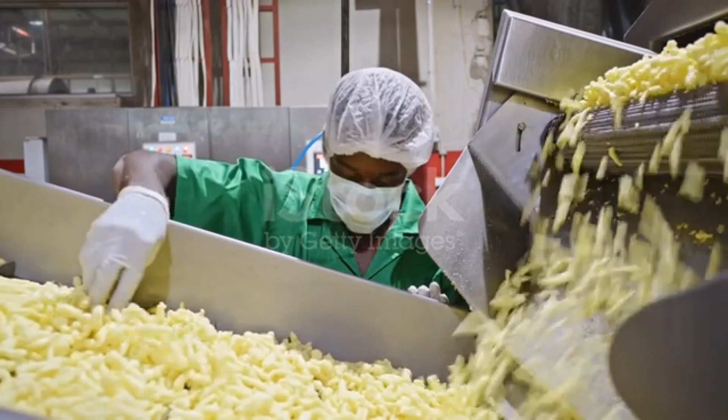This steady growth is being assisted by anticipated recovery in global tourism, increased manufacturing activities, and a number of mega projects. As we have heard about those statistics, we have seen mega projects as one of the areas Rwanda is using seriously to attain its goals of economic growth and development.

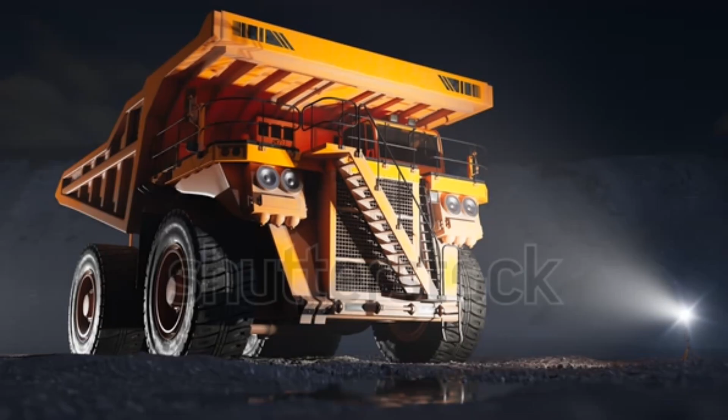In this video, let's put focus on a number of mega projects Rwanda is coming up with from 2024 through 2025 up to 2026.

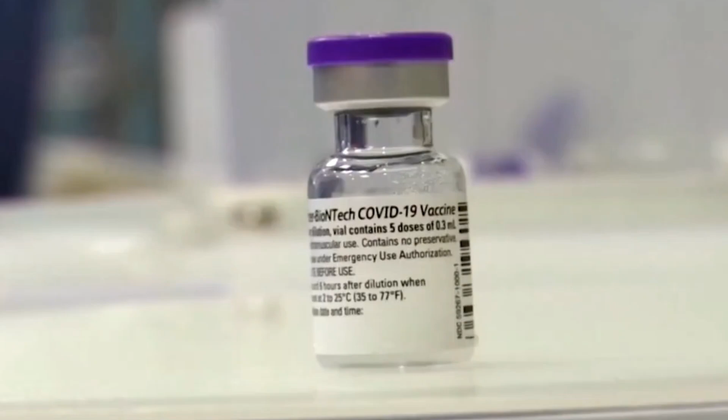BioNTech mRNA Vaccine Manufacturing Facility Project. With an aim of setting up the first BioNTech high-tech manufacturing solution for messenger RNA vaccines, or simply mRNA vaccines.

mRNA vaccine is a type of vaccine necessary for protein production for treatment of viruses such as coronavirus, and is a magnificent upcoming project in Africa, specifically in Rwanda, for future pandemic preparedness.

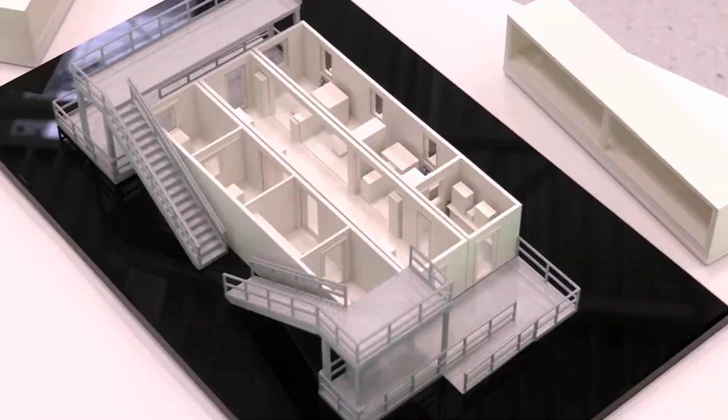BioNTech, a vaccine manufacturing company, is willing to accomplish a number of structures at the Kigali site, after which local training will be provided for specialist personnel at the facility in 2024.

Thereafter, mRNA vaccine production for process validation is expected to be initiated in 2025.

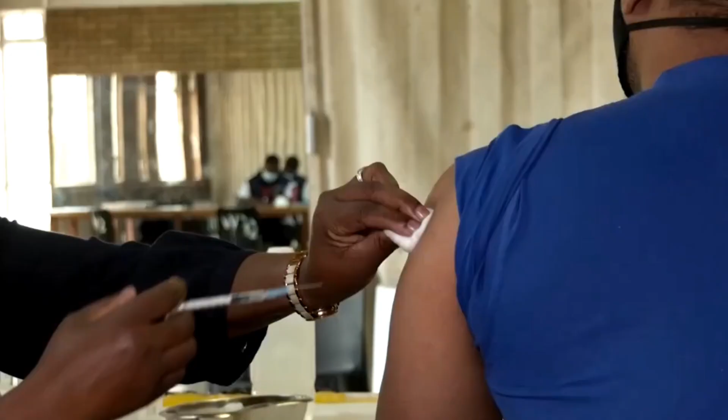If all goes as planned, the Kigali facility will serve as a lighthouse project for subsequent mRNA-based vaccine manufacturing facilities, in terms of both smaller and larger scale, supporting clinical developments for local and regional demand.

In addition to coronavirus vaccine, other vaccines for HIV, malaria among others, are in preparation for manufacturing at this Kigali site.

Rusizi Port Construction Project. With a goal of facilitating water transport on Lake Kivu, the Rusizi Port Project will boost trade between Rwanda and the Democratic Republic of Congo.

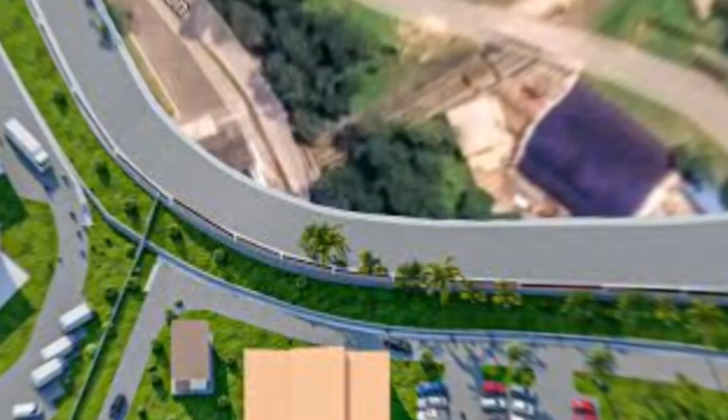Aimed for completion in December 2024, the port will be able to accommodate up to 0.3 million passengers and also handle over 1.3 million tons of cargo annually.

Rusizi town seriously needs this port, as a number of businesses, trade among other activities are carried out on Lake Kivu. Once fully completed, a number of towns will benefit from it, such as DR Congo's Bukavu or Goma.

Also benefiting are the islands of Ishwa and Nkombo among others.

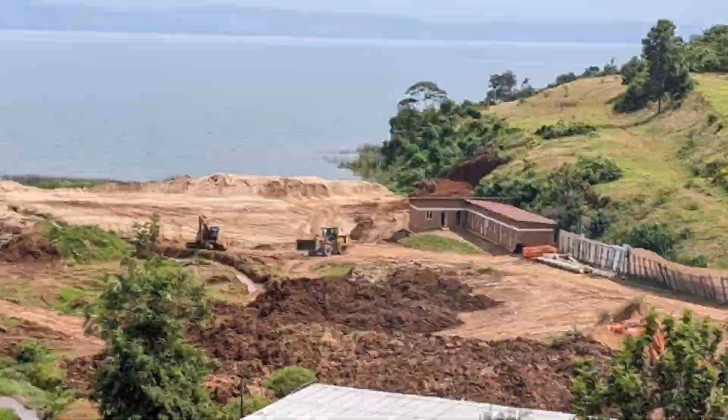Expansion of Karenge Water Supply System Project. With funds from OPEC Fund for International Development, which is supporting sustainable water supply in Rwanda, with a new $21 million loan.

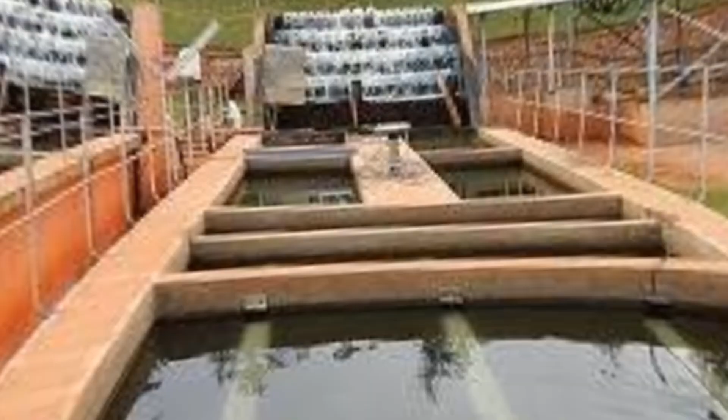The expansion of Karenge Water Supply System is the major beneficiary of this loan.

Located on the shores of Lake Mugesera, about 50 kilometers southeast of Kigali, the project will benefit Rwanda's capital, Kigali, and the surrounding areas in Rwamagana district.

The enlargement of the plant will quadruple its capacity to 48,000 cubic meters per day, aimed at meeting the local demand until 2050.

With Rwanda's efforts to improve water management systems and provide access to potable water and sustainable services to meet rapidly growing demand, this loan aimed for this project is a major boost for that goal.

Through sustainable water management, this project will also be important, assisting in mitigation of impacts of climate change, fostering better health and creation of new economic opportunities in Rwanda.

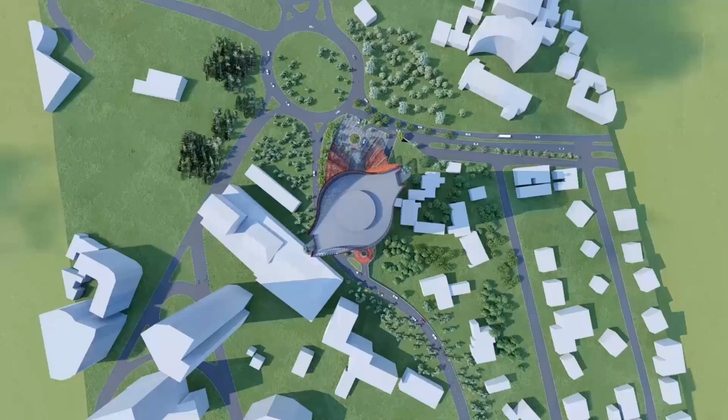Kigali Green Complex project. With 2024 being the targeted year for commencement of its construction, Kigali Green Complex will be the first ever gold-rated LEED green, well and smart mixed-use complex.

It will also be the tallest building in Rwanda, being built in the central business district.

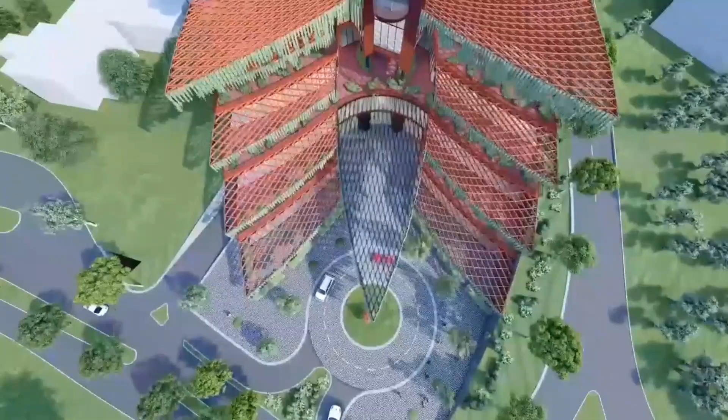On the land formerly occupied by the French Cultural Centre, the complex will have 29 stories, taller than the Kigali City Tower, which is currently at 20 stories.

The complex will have 82,971 square meters of gross floor area and will be set up on a plot of land with an area of 7,600 square meters.

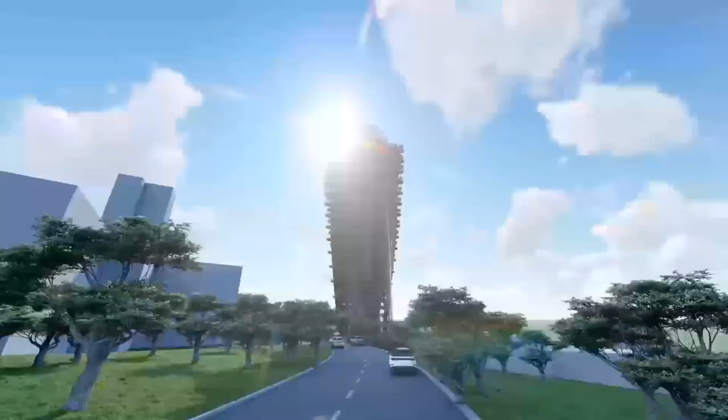The multifunctional space including bank space, retail space, office space and car parking with 430 slots will make the complex one to look at in Rwanda.

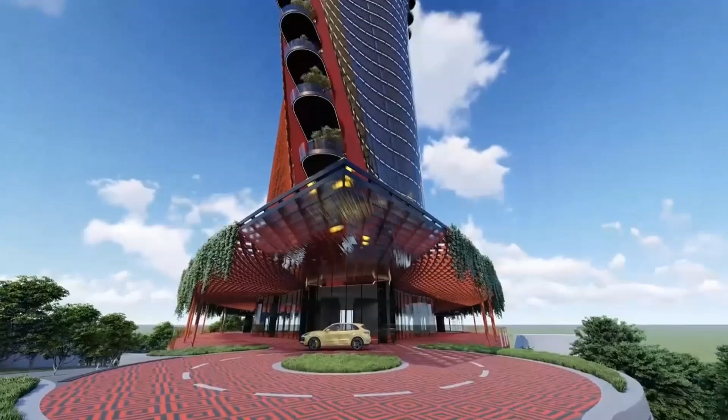Leadership in Energy and Environmental Design, or simply LEED, is the most widely used green building rating system in the world, developed by the US Green Building Council.

The complex is expected to be based on the same format.

Shelter Group, a UK-based construction company, is the main contractor for the project.

New Gahini Eye Hospital project. Being expected for construction in the eastern province of Rwanda, the project will save patients from the long distance to Kigali Eye Hospital.

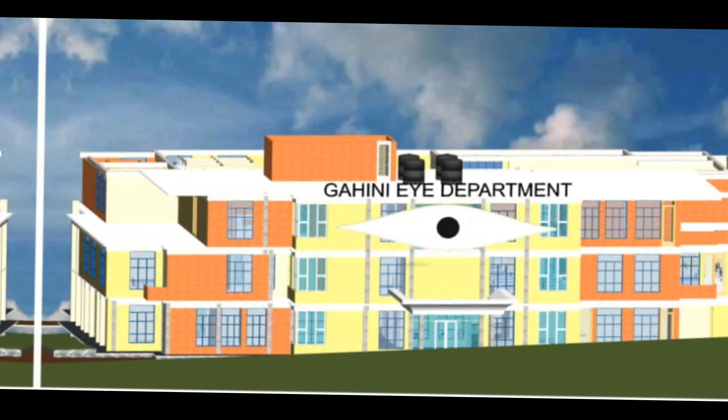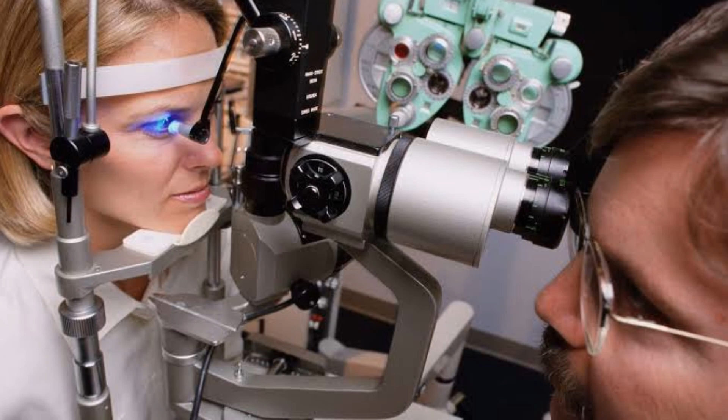Valued at over 900 million Rwandan francs, the hospital will be equipped with the latest equipment, providing diagnostic, therapeutic and rehabilitation services for the blind and patients who are visually impaired.

Critical issues such as lack of operating rooms, more especially for children's eye diseases, will be solved if this project is finally realized.

Arc Power Rwanda Mini Grids project. This project is aimed at supporting the rollout of tens of thousands of new and improved connections in Rwanda through grid extension and the construction of interconnected mini-grids, with partnership between Arc Power, a UK-based developer, and the government of Rwanda.

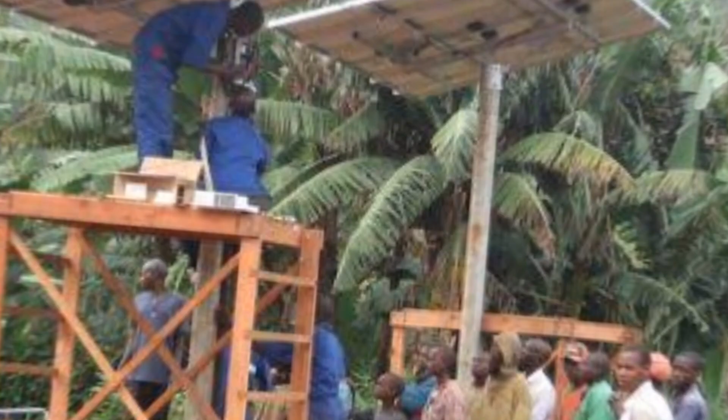Over 148,000 people will be connected to clean electricity by the end of 2025 through national electrical grid extension and the construction of interconnected mini-grids.

Districts such as Bugesera and Gatsibo, in over 14 villages, have had over 10,463 people and over 155 micro-businesses connected to power for the first time.

The project is expected to save customers who are relying on traditional energy such as kerosene, diesel and firewood.

Logistics corridor linking Tanzania to Rwanda project. Being supported by the Egyptian Ministry of Transport, this corridor will connect Dar es Salaam Port to Rwanda, aiming to enhance Egyptian exports access in Africa and also strengthen Egyptian-Africa ties.

The project in detail will start from Dar es Salaam Port in Tanzania through a logistics area and dry port in Tanzania, reaching a dry port and logistics area in Rwanda.

The project is expected to enhance logistical efficiency, reducing transportation costs, and strengthen Egypt's ties with other African countries.

Nyabugogo Bus Terminal Upgrade Project. This busiest bus center in Rwanda is set to be revamped to increase the number of buses it receives.

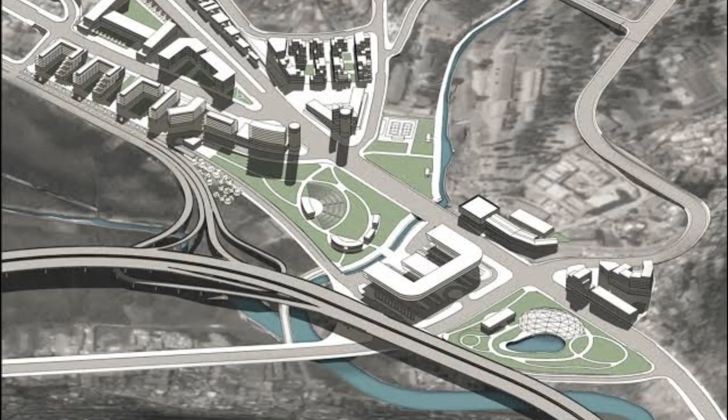About 45 billion Rwandan francs had earlier been slated for the project, but this cost is expected to increase in accordance with the additional activities in the project.

The terminal is expected to be upgraded into a multimodal terminal station where all modes will be accommodated. In addition, the terminal will have space for travel-related businesses.